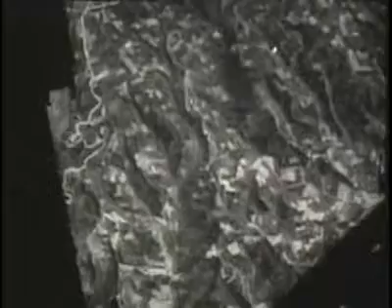Ballistics is an increasingly important and complex science that deals with the technical problems involved in hitting a given target in the field and getting the desired tactical results. Sometimes the ammunition we need to do a particular job can be carried to the target or placed in the target's path. Sometimes it can be dropped on the target. But in most cases, it has to be fired or propelled.

This involves the solution of three different kinds of problems which are covered by three closely related divisions of ballistics. Interior ballistics is concerned with the launching of the ammunition. Exterior ballistics is concerned with its behavior in flight. And terminal ballistics deals with the action of the ammunition at the target.

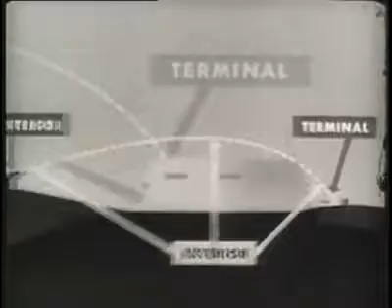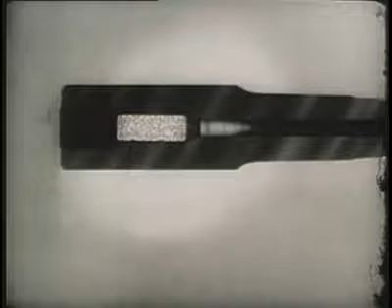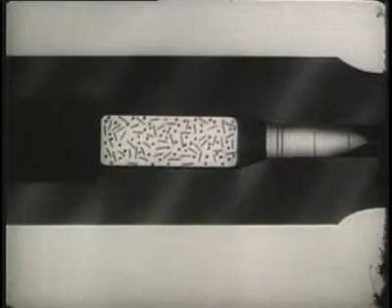Let's look first at the problems involved in launching our ammunition with launching devices that are complex, precision-made instruments, but which operate on a principle as simple as that employed in a pea shooter. When the pressure behind the projectile becomes strong enough, the projectile will move. In any gun, howitzer, mortar, or small arms weapon, the pressure behind the projectile is caused by the burning of the propelling charge or propellant, which forms a tremendous amount of gas in the chamber.

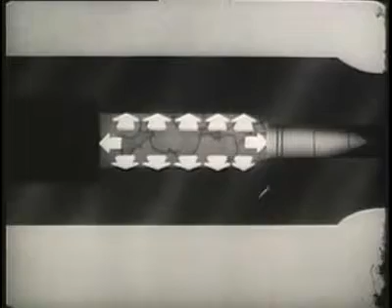This pressure is measured in thousands of pounds per square inch and is exerted equally on all surrounding surfaces, but with different results. The forces represented by the vertical arrows have no effect on the projectile. The pressure or force to the right is against the projectile, the most readily movable of the surrounding surfaces, and sends it out of the bore. At the same time, the force to the left is against the gun, which moves in recoil.

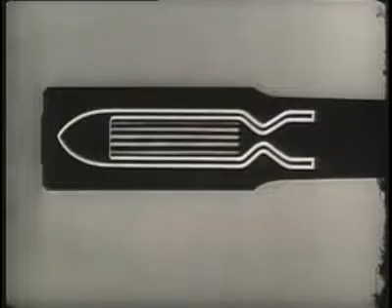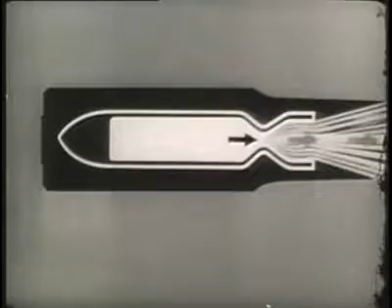By making a few changes in our simplified gun, we can see what happens when we launch a rocket. In effect, the lightweight rocket replaces the gun, and the lightweight gas replaces the projectile. The pressure inside, being equal in all directions, forces the gas out of the chamber at an extremely high velocity. At the same time, the pressure exerts an equal force to the left to propel the rocket.

Military rockets operate on exactly the same principle as the 4th of July variety. The bazooka also uses the rocket principle, while the recoilless rifle is a combination gun and rocket. The propellant used in guns and most rockets is some form of nitrocellulose, commonly called powder. Modern powder is made in grains, the grains taking many different forms to get the various pressures needed in the many different modern weapons.

Apart from chemical composition, grain size is the most important single factor in determining how rapidly a powder charge will burn. Just as wood shavings will burn more rapidly than the same weight of logs because there's more burning surface exposed, so will small grains burn more rapidly than a large grain of the same weight. When small, rapidly burning grains are used, the propelling effect is that of a sharp, sudden thrust. The effect we get from large grains is that of a sustained push.

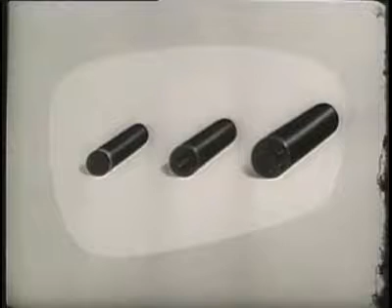But grain design also affects the rate of burning. In general, there are three types of grain: a large grain with 7 holes, a medium-sized grain with 1 hole, and a small solid grain called a degressive grain. When ignited inside a gun, it burns fast and the pressure rises rapidly. As the burning surface decreases, pressure is generated at a slower rate.

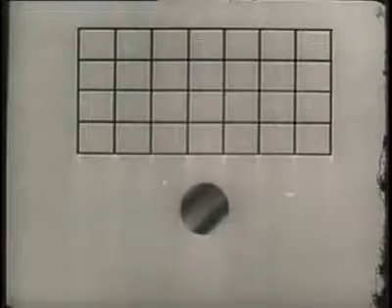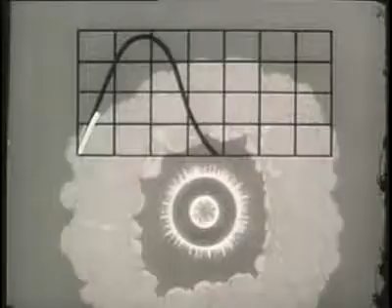Here's a graph to show pressure action during burning. The degressive grain produces a very high pressure quickly, but the movement of the projectile tends to let the pressure drop off rapidly. The medium-sized grain with a single hole is called a neutral grain. In this form of grain, the burning is slower at first, but the burning surface remains constant during the burning period. Thus, the maximum pressure is not as high as with the degressive type, nor does the pressure drop off as sharply when the projectile moves.

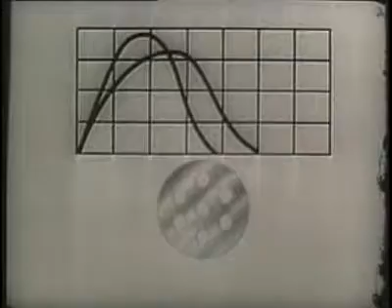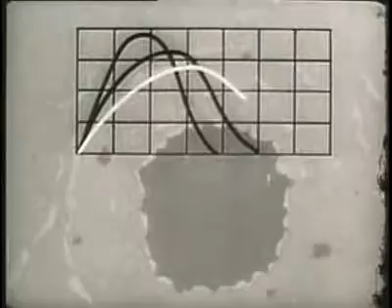The large grain with the 7 lengthwise holes is called a progressive grain. Here, the burning surface increases due to the number of holes. The pressure produced is not as high as with the others, but it falls off even less rapidly as the projectile moves. This grain is preferred in modern high-velocity weapons because it gives the projectile a steady push, produces higher muzzle velocities, and has a lower maximum pressure than is possible with other types of grains. There are many other grain designs, the fast-burning powder sheets for mortars, for example.

Neutral tube-shaped grains for certain types of rockets, as well as a variety of other kinds, each designed to provide the particular burning characteristics best suited to the weapon concerned. Now let's see what kind of pressure action we need for different guns.

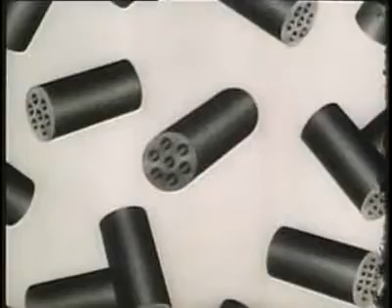When we burn a suitable charge of progressive grains, the pressure is moderate and sustained, sending the projectile out of the bore with a continuous push. This kind of pressure action is just what we need to get high velocity in long-barreled artillery.

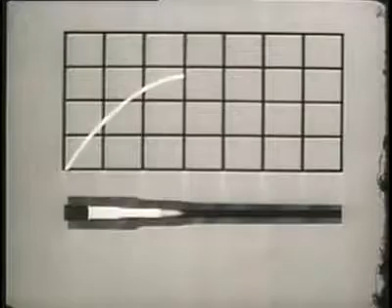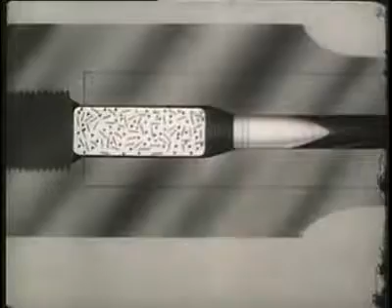But now we'll see what happens when we use the same charge in a short-barreled weapon. There's considerable muzzle flash, and the powder continues burning even after the projectile has left the bore, indicating that energy is being wasted. For a short-barreled weapon, a small degressive grain should be used. This builds up maximum pressure quickly to accelerate the projectile in a short space without undue burning afterward.

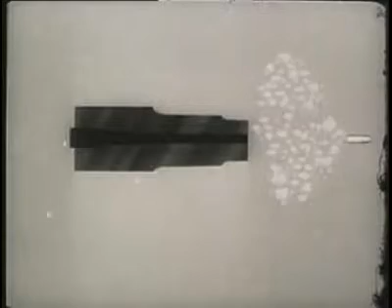This kind of pressure action is just what we want for low-velocity weapons, such as mortars or pistols. But if we use degressive grains in a long-barreled gun, there's a chance that the higher maximum pressure produced will blow it up. For a rocket, we need a low, steady pressure, so we use a special neutral grain. The low pressure will not burst the lightweight rocket, yet give smooth acceleration.

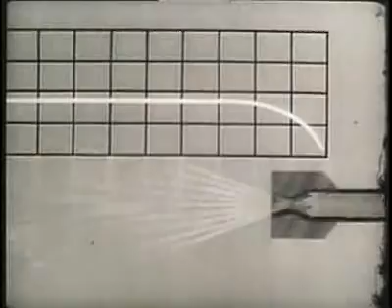For the V-2 and other large rockets, it's better to use certain liquid propellants, mixing them at a constant rate to assure constant burning. In all cases, the propellant must suit a particular tactical purpose. That means providing the desired velocity with a minimum of smoke, flash, and wear on the weapon.

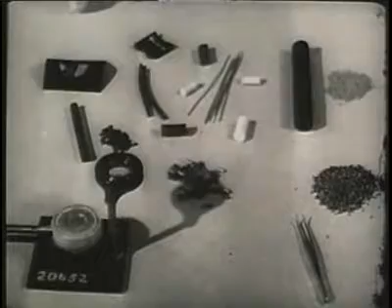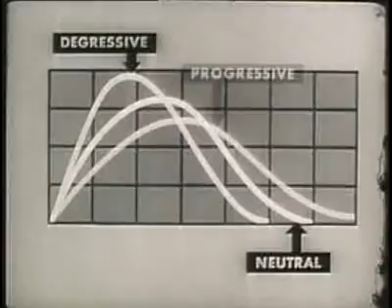Interior ballistics is a highly complicated science, and what you've seen isn't the whole story by any means. But you do know what an important part pressure plays in launching the projectiles. You know something of the effects of grain size and design on gas pressure. And you know the relative burning action of the degressive and other types of grain. In other words, you've got a good idea of why and how a projectile leaves home. Now you're ready to consider exterior ballistics.

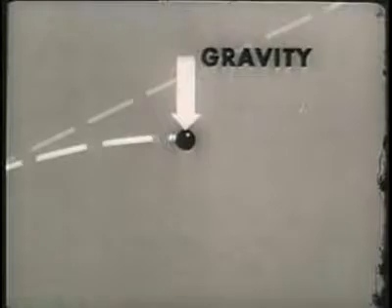Exterior ballistics is concerned with the behavior of projectiles in flight. If we could fire a cannonball, influenced by no outside forces, it would continue forever in its original direction at its original velocity. If we add the force of gravity, the cannonball follows this sort of path or trajectory. By adding air resistance, we get this result, and the range is shortened still more.

To overcome air resistance and get greater range, we might streamline our cannonball, stretching it into a projectile. But look what happens. Our projectile tumbles, and the range is shorter than ever. We need something to stabilize our projectile in flight. One solution is to equip the projectile with fins. The use of fins solves the problem very effectively for mortars and some types of rockets, and the result is much greater range. Having the projectile spin is another solution to the tumbling problem.

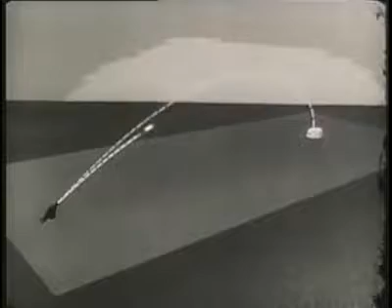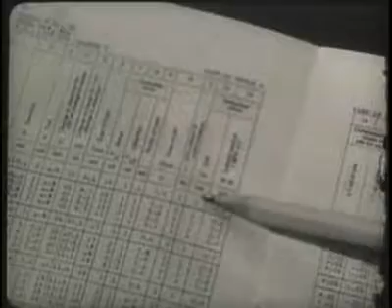This, however, causes the projectile to swerve from a straight course, drifting to one side according to the direction of the spin. That isn't as bad as it might seem because we know it's going to happen, and we allow for the drift in aiming. To get the required spin, spiral grooves are cut in the bore of the gun and a soft rotating band put around the projectile. The band engages the grooves and the projectile rotates or spins.

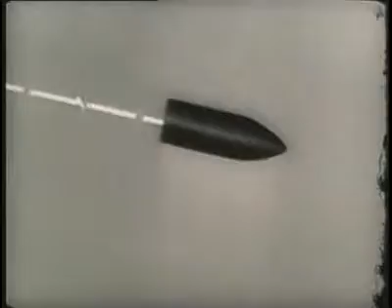Although there are many forces affecting the projectile, the most important to remember are gravity, which pulls the projectile down, and drag due to air resistance, which slows the projectile. There's nothing we can do about gravity, but we can overcome the effects of drag to some extent in the design of our projectiles. For instance, by the streamlined windshield on this one. Boat tailing, another method of streamlining, also helps to reduce drag.

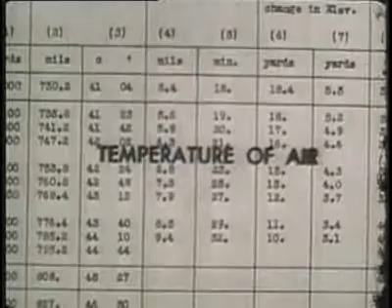For long-range fire, we must consider, in addition to gravity and drag, the effects of varying density of the air, the temperature of the air, winds over the trajectory, and the rotation of the Earth. The basic problem of the exterior ballistician is always the same: to study, improve, and predict the behavior of projectiles or missiles in flight.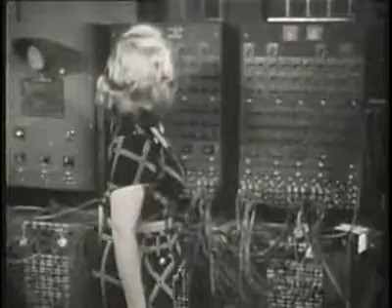Solution of the problem involves the knowledge of many complex forces, the application of many scientific principles, the use of many ingenious lightning-fast computing machines. The ultimate purpose of all this is to design projectiles and compute firing tables, both of such accuracy that our combat units get the maximum number of direct hits.

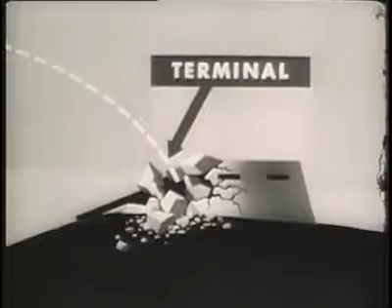And that is where terminal ballistics comes in. In terminal ballistics, we are concerned with what happens at the target, with the problem of getting the type of action we want for each different kind of target by the most economical, practicable means.

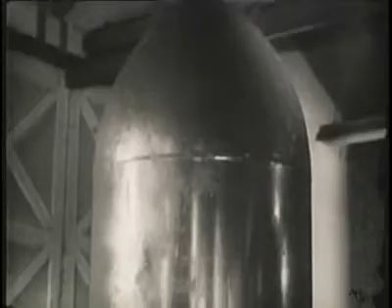Our projectiles, bombs, warheads, mines, grenades, and so forth are designed to provide different basic effects. By using a large amount of high explosive, we get an effect called blast, making use of violently expanding gases under tremendous pressure. Blast shatters brittle masonry or concrete. It will also twist and tear the metal construction of buildings and vehicles.

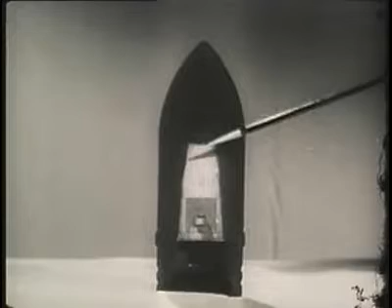If penetration is the important thing, we can use a high-velocity projectile with a tough nose and little or no explosive. This sort of projectile will penetrate wood, stone, and up to several inches of steel.

By using certain proportions between the weight of the explosive and the thickness of the projectile, we can get fragmentation. Our projectile or bomb breaks up into hundreds of flying fragments. They penetrate like bullets, but leave more jagged, irregular holes. Fragments from bursting shells can do severe damage to personnel and to light structures, such as this plane.

Finally, by using incendiary projectiles or bomb clusters, we can start fires to cause great damage in a city, or in a structure or area where large quantities of supplies are stored. Generally speaking, each type of action will be effective against one particular type of target, but a combination will be even more effective. So our projectiles and bombs are usually designed with such a combination in mind.

Now, to time or control the action of the projectile at the target, we use different types of fuses. Some of our fuses act on impact, either instantly or after a short delay. Time fuses act at a set time after launching. Proximity fuses, when they get near the target.

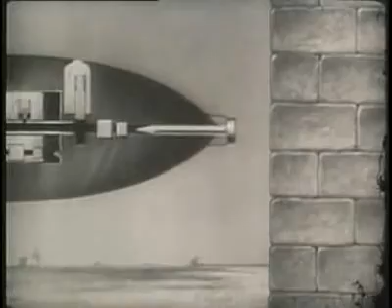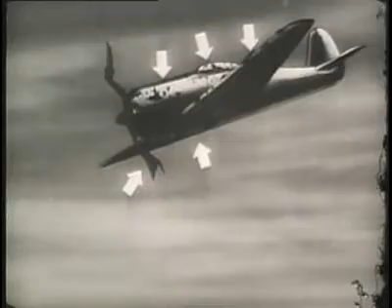Now let's consider a typical application of these fundamentals of terminal ballistics in dealing with an enemy plane. Fragmentation is the effect we want. Besides endangering personnel in the plane, flying fragments can wreck the engines, weaken structural members, and may penetrate the fuel tanks, generating enough heat to start a fire. The shell to do this particular job must carry enough high explosive to shatter the shell case and produce high-velocity fragments of the most effective size.

Now, what about the fuse for this job? We might use a time fuse, but our best bet will be a fuse of the proximity type, one that will go off automatically when it's near the target.

If we're dealing with an armored target or one of reinforced concrete, the first problem is to penetrate. So we need a tough-nosed, armor-piercing projectile that will be strong enough to withstand impact, one that will penetrate without breaking up. Fragmentation is effective after penetration, so a small explosive charge is added. In this case, the fuse must be placed in the base of the projectile and should have a short delay action after impact. The combined effect of penetration and fragmentation gets both the pillbox and its occupant.

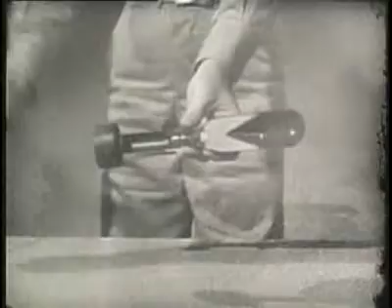If we don't have high velocity, we can get penetration by sharply focusing the force of the explosion. This is done by the proper shaping of the high explosive charge. It's up to the terminal ballistician to determine from his experience and his experiments which combination of effects will be the most destructive for each kind of target.

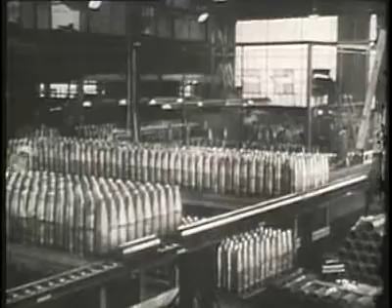And there are other elements to be considered by the terminal ballistician. In all cases, the ammunition he prescribes must be suitable for mass production. It must also be safe to handle, transport, and store. Technically, it must present no impossible problems in any phase of ballistics.

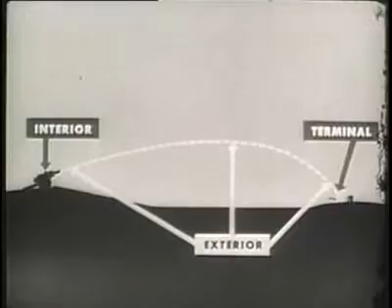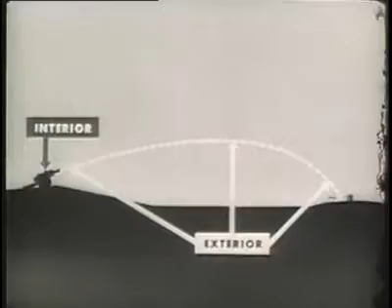The first concern of the interior ballistician is the safe and successful launching of the ammunition. The important point to the exterior ballistician is predicting its behavior in flight. By means of firing tables, this information is passed on to the appropriate using units. They, in turn, must launch the ammunition with full confidence that the terminal ballistician has provided it with the proper destructive potentialities at the target.